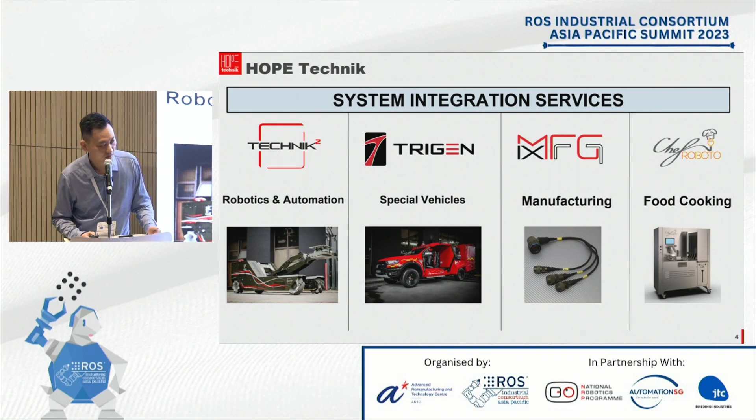For today's session, I'll focus a bit more on Technik Square, the special projects department that does a lot of crazy projects throughout the years. As you can see, in one shot, there are different solutions for different industries from a different TRL level, from low TRL to high TRL level.

Okay, but we don't go that low. We will start off at around 5 to 6, and then progress all the way to 9, which is a full-fledged product with all the ILS support as well.

So we are into farming, vertical robotics farming, and you can see tunnel inspection robots that run through 40 km of the underground tunnel that is manned by the SP group, as well as a firefighting robot that enables you to force multiply for Homeland Security, and developing projects like a mobile hospital delivery robot whereby we serve food

trays to the patients. That is a bit more experimental because when we serve things to patients, it's not like a cobot whereby the robot can actually touch softly onto the patients. This arm is not supposed to even touch the patient at all, because we are afraid that patients will actually sue you if you touch them even a bit. So it's a different kind of safety mechanism.

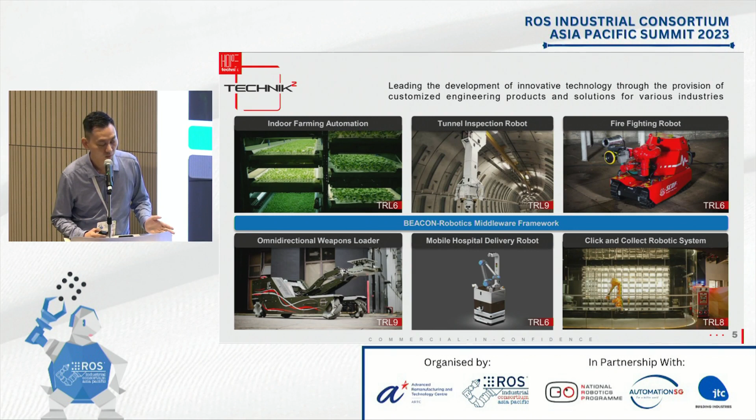And even in public spaces like click and collect robotic systems that we implement for the Funan Lifestyle Mall, I think that is very refreshing because in public spaces we have our own set of challenges. So we did things from indoors to outdoors, to ruggedized, to defense domain. We are a team of around 90 to 100 engineers in Technik. That's our strength. Okay, let's start off our journey.

We mainly classify our robotics into 4 areas, the 4 A's as we call it. It comes from assistive, whereby semi-automated robots help and enable a person to do more, followed by automation, which everybody knows, then the autonomous part. After that, when we gather enough data, we use analytics, the smartness of it, to make sense of the data, which we are actually doing right now.

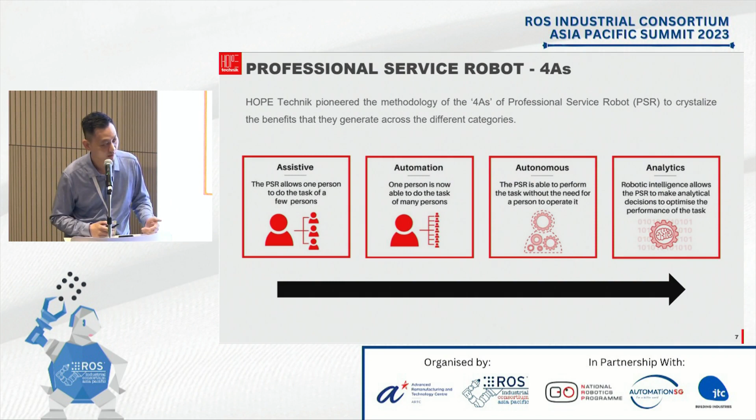The first 5 years is interesting. Remember we talked about selling car parts and it didn't work out, so we were forced to go into robotics. Way back then, we were into flying robots, what we call drones, whether landing on the ground or on the sea. Anything that flies back then was a big thing, so we were absolutely crazy about that. We were also into small platforms, wheel platforms, track platforms, putting simple payloads on them to enable simple tasks. That was way back then - Arduino, autopilot, all interesting stuff - but we moved on from there.

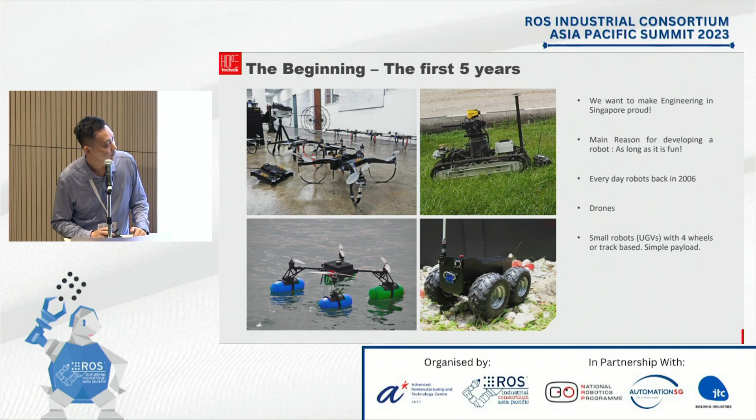What happens after the first 5 years? In the very first 5 years, it was all about the fun factor - anything that's fun, we were crazy about it, we were a small group and wanted to do that. Then as we progressed, we found that we needed to earn some money.

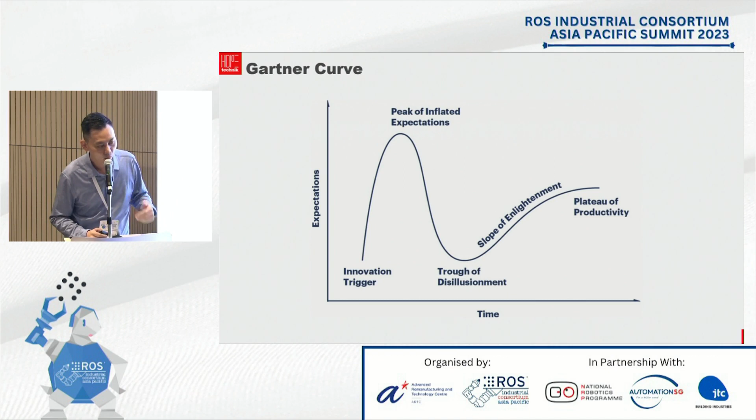So we got to know the Gartner curve. Not too sure if anybody knows that, but a new hype usually starts from the left-hand side, and everybody goes wow. Then through technology, experimentation and actual use, people find that it falls short of expectations, and they start to lose confidence. Then it cools off for a while. Engineers begin to wake up and do a bit more, and then it moves to the right of the curve and becomes ready for the industry. But we actually have products along the entire curve, which we'll explain later.

So we began to focus a bit more on the social and the P&L portion - P&L to survive, definitely, and also a social part. We want to do something that means a lot to the customer, to actually help Singapore as well, because we take pride in our engineering. We want to make engineering great in Singapore. That's actually the key mission for Hope Technik.

On the left-hand side you can see AMRs. These are early days - anything that moves from point A to point B is actually great, delivering stuff in semiconductor industries. Also semi-assistive robots, for example the bed mover, where we plug something into the manual bed and are able to power-assist it, so fewer people are needed to navigate and push the bed. Things like that. We also thought about a firefighting robot, and for Airbus we did something like an aircraft that is able to launch mid-air to test out their flights.

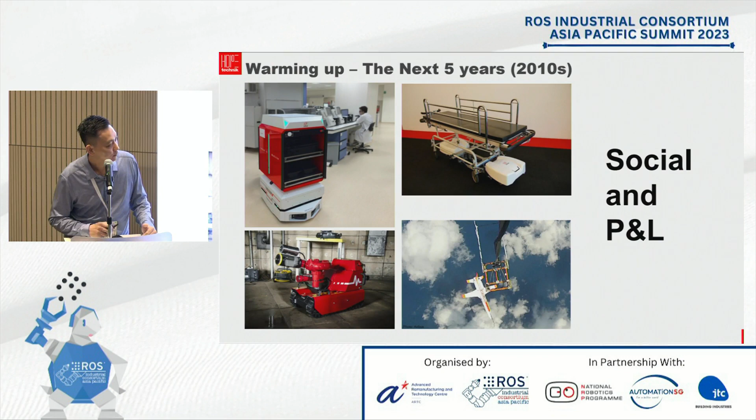This is a big picture on drones, tethered drones, and also UGVs that we demonstrated at one of our National Day events at the National Stadium. That's kind of a big thing to us, because unlike regular projects, National Day doesn't move - no matter what, we need to get it to work. The communication frequencies were very challenging as well, since everybody is using some sort of frequency, and we were down to very challenging, narrow bandwidth, so we had to make do with that. We had to get creative and use our fundamental engineering to do that.

But that's not the point. The point here is, if you look at the extreme right-hand side, you can see a drone, the DJI drone - how cheap is that? So it mainly points to a sunset industry for drones for us. We are very sad to embrace that, but that's the sad truth. We have to scale down our drone activities because things are getting cheaper and cheaper, which is a good thing for technology, but for us we have to pivot, because we can't be building custom drone platforms better than DJI unless they're very, very big drones. So we decided to move on.

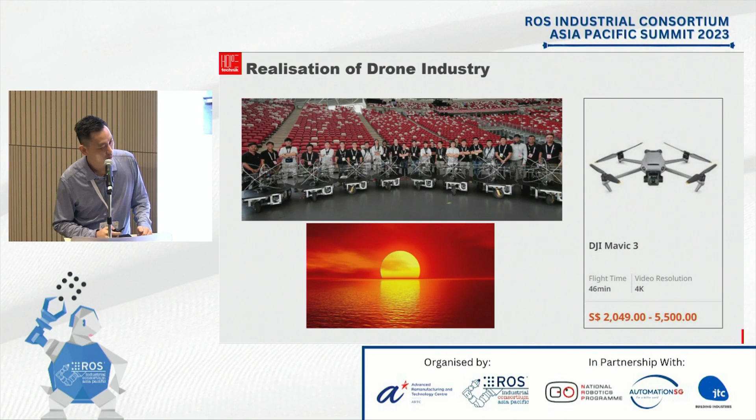And also things like the casualty relay robot used in homeland security, following the line-following technique instead of autonomous. Of course, as we move along, it gets more and more autonomous, but back then it was actually a line-following robot. It has its merits, because in the red zone, we're able to lay the lines very quickly with our human perception, avoid obstacles, and then this structure just moves along. It does have its own merits, because if it were autonomous, if something comes up, it will just hang somewhere, right? But for this, it's a bit more stable.

So we have to make sure that we have the right technology for the right applications. Even if the technology is moving as fast as it can right now, is the industry ready? We have to pause and think. Are they willing to even spend that kind of money for that purpose? What problems does it solve? That's very important, so there's actually two fronts. I would say the industry is one or two notches back.

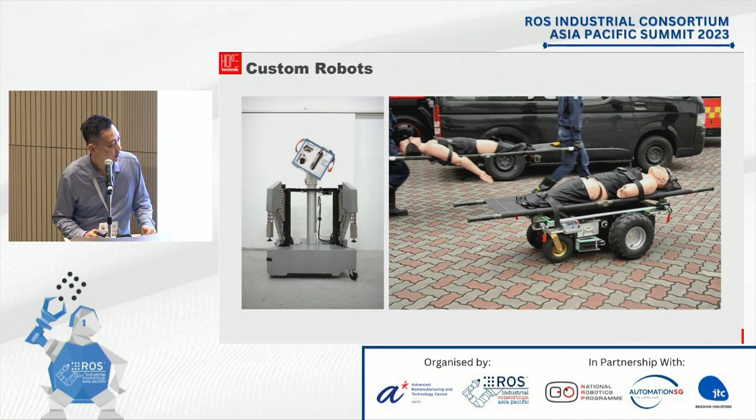And we also do exoskeletons, very interesting stuff, passive or even active. We have explored electronic, hydraulic, and pneumatic versions of it. We find that pneumatic versions actually work better, at least for the firefighters. This is one of our staff who came a long way, and he's kind of the father of exoskeletons in our team. Together with a small team, we are able to churn out exoskeletons.

This is very experimental, I would say, because back then Marvel and Iron Man were the key thing, right? So everybody that wears metal feels invincible. But when the engineers actually wear it, they find that there's actually more things to work on. So it's still very experimental. I believe one day we'll be able to be powered by these suits, giving us more dexterity and also power to perform our tasks. But right now, I would say it's very conservative. That's why you don't really see many effective powered exoskeletons around the world.

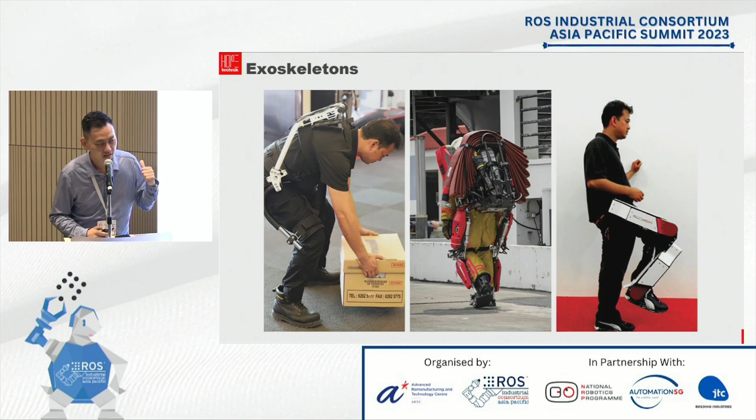But how many years has it been for this kind of robotics?

AMRs need to evolve as well, but evolve in a way that they get smarter, and when they see obstacles, they're not just able to stop, but able to avoid them using visual and other sensors. We spun off a separate company called Sesto Robotics in 2018 so that it could focus on the product and the platform. You can see on the right-hand side it actually has a removable payload layer, because initially we were integrating everything by itself, so our thought process, everything was not really modular. As we go on, we want to scale a bit more, that's why we adopt modular solutions. Having a removable payload is very important for us, as it gives better ROI to the customers.

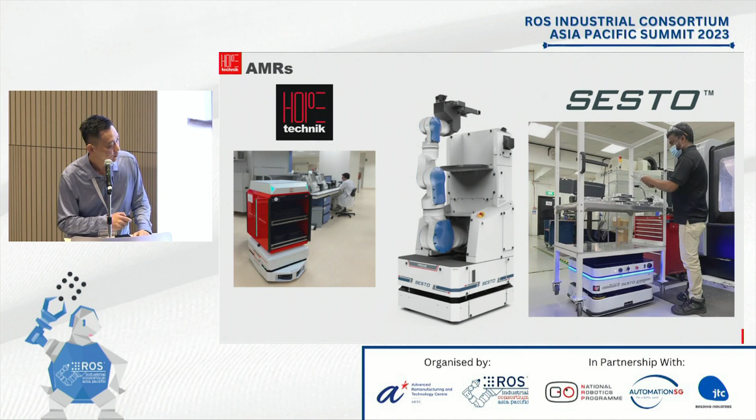Okay, so back to the tunnel inspection robot. We make use of certain technologies that are somewhere in the middle of the Gartner curve - not to the extreme right, but not too far to the left either. Because back then we found that if we get too conservative, it doesn't really serve the purpose of a tunnel inspection robot, so we have to do something there. But you know there's an 80-20 rule, so the 20% that is lacking in features, we have to make do and work out with the customer so that we can walk the journey together. If not, we will forever be unable to embrace certain technologies.

That's very important. I will split the customers into two parts. One part of the customers will be very profit and cost conscious - what can you save them? You can have the sexiest technology, but if it's not going to save them money or solve their problem, they won't invest.

They would like to see other people adopting it, but it doesn't always work out for the business. After we tell them the cost, they'll start asking for a more cost-affordable solution, and that's where the technology actually scales down. The other type of customer is more tech-focused, more for show rather than solving real world problems. We have both kinds of customers, so there are two categories.

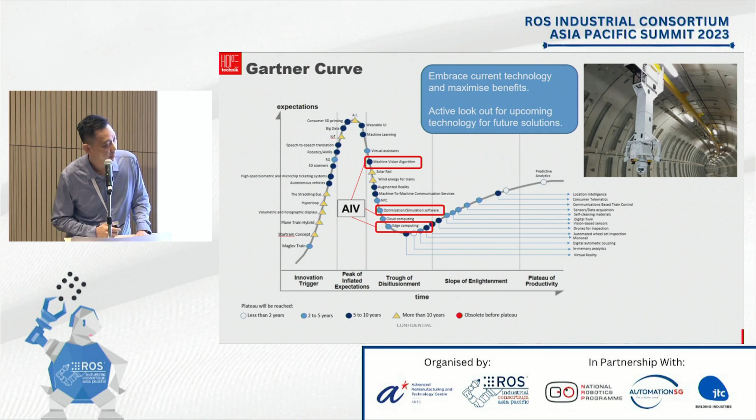As we move along, we need to talk about scalability, because just making platforms and solutions across many industries doesn't really work out like that. We need to see how we can push the boundaries in terms of tech, and also solve real world problems.

For example, on the extreme right hand side, you can see this autonomous outdoor forklift that was done a few years ago to test whether it makes sense and what boundary conditions we'd have when deploying autonomous forklifts outdoors. The pallet has payloads that are double layer and very flimsy. These are real problems - not just detecting the pallet and picking things up, but what if the thing is flimsy? What kind of mechanism should you have to balance it, and how can you structure the whole environment so it can better be used in the real world?

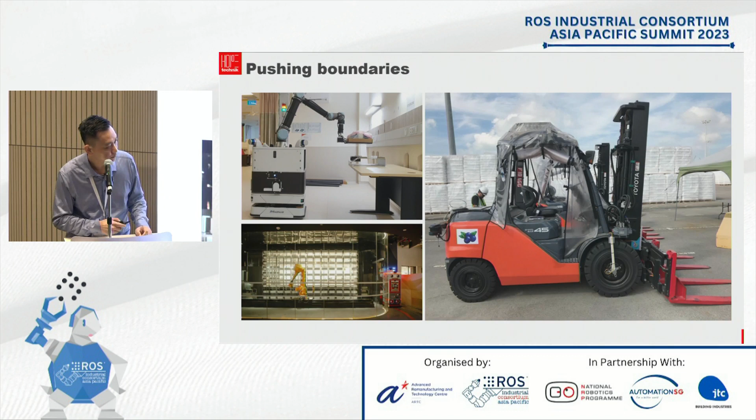As we move along, we have a partnership with SIAEC. We did engine inspection robots and also seat track inspection robots to check the conditions of the seat track, so that inspectors can pick this up more effectively, leading to manpower savings.

If you take a look at this, the technology we use is not the latest and greatest - it's not the AI version, it's like one step back, because it just works for them and there's no reason to spend additional money. Of course, as the AI gets better, we will be a fast follower and adopter of it too, so we can put a bit of smartness inside and make things work better.

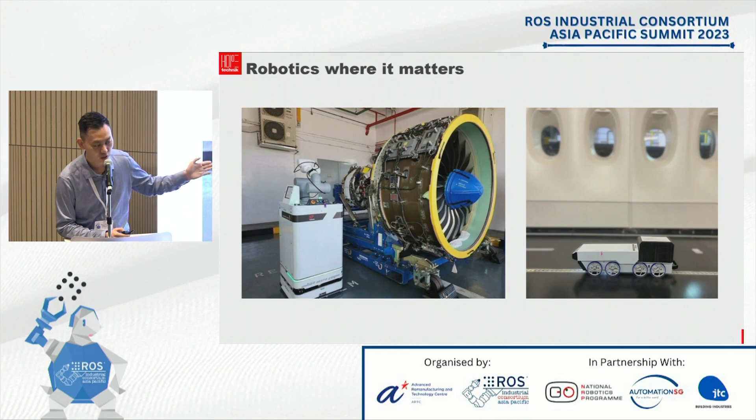But that doesn't mean they're willing to pay for that right now, because to use AI and such, the company - at least for SME - needs enough talent to actually do this, and how many months do we have before we can have that capability and implement it in the short duration of time that they want? These are things we also consider.

Vertical farming as well - we are talking about robotics vertical farming. Vertical farming is pretty common, but robotics vertical farming is not that common. That's why we started to sensorize a lot of things, doing a lot of IoT and putting things in the cloud so we're able to manage this automation. A lot of PLC has been used as well. But for some projects like defense projects and other customers, we use a lot of on-prem stuff, so cloud access is not there. We have to select our technologies accordingly.

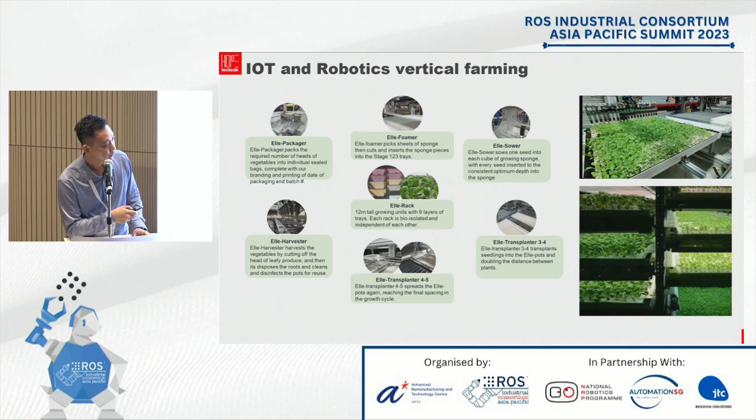Yes, I think many of you have seen this before - that's the robotics middleware framework, as taught by many people as well. We got into this a few years ago under a grant by MOH and also NRP. Very fortunate to have the grant, thanks to them. Working together with our partners, we came up with this middleware layer that was meant for healthcare, but we all know it's agnostic to industries.

That's why we use it in our projects as well - not necessarily as a product. Sometimes we use it as a product, sometimes we put it as a layer into our project so we can enjoy that kind of scalability and future-proofing. It allows different brands of robots and systems to gel together, and also the infrastructure to connect to this layer so we have better command and control, prioritization, and traffic control.

I think that's kind of the in thing right now, because a single solution doesn't come from a single brand of robots - it comes from different sectors, different suppliers, different brands of robot systems. So as system integrators, we need to have something that's able to bring everybody together.

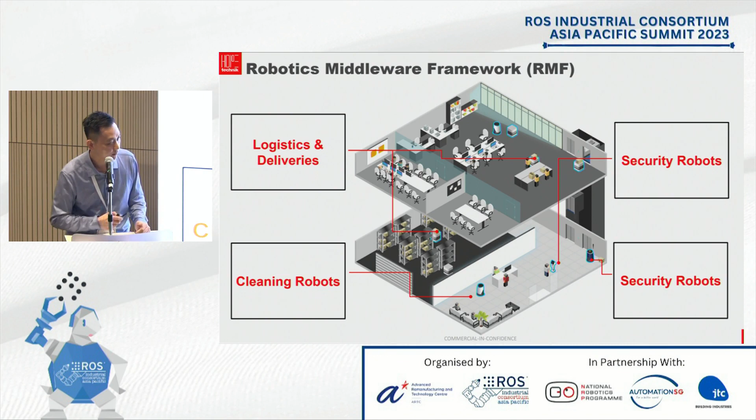So what is next for us? Right, so very recently, we have integrated more advanced payloads into different platforms.

And also, if we use platforms from all around the world, if we need secure communications, how are you going to do it? So we are also developing a certain secure comms kit that we can plug and play into different robots as we deem fit. So it all boils down to the application that is required, and then we develop a technology for it. And we don't reinvent the wheel - if there's something out there, we will definitely use it.

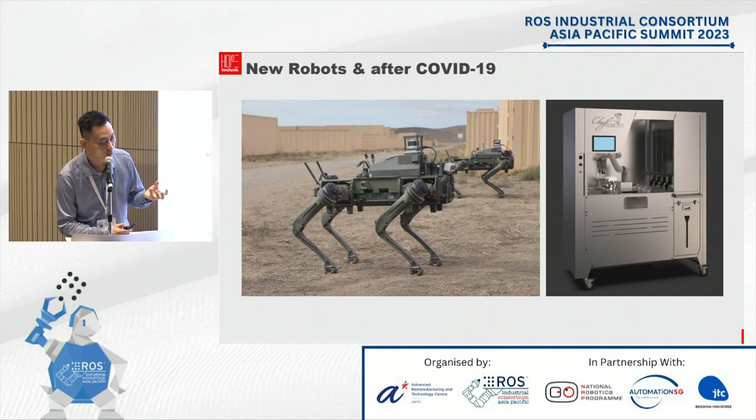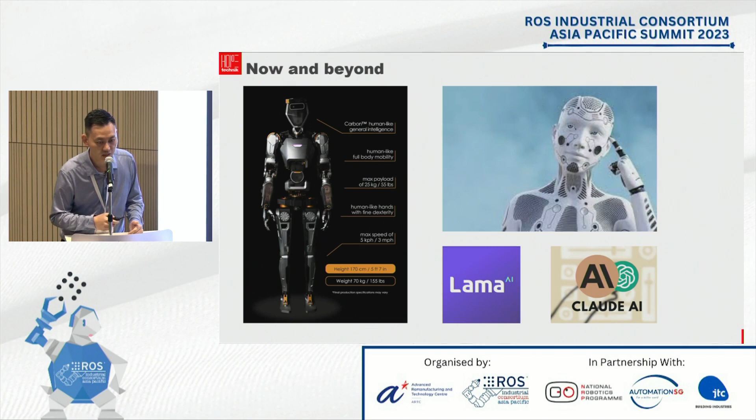So that is something that we need to be practical about. If they are not going to pay a lot, then how can we even squeeze in these kinds of technologies right now? So I would say that there's some lag there, and the expectation is if everybody is doing it, it should be cheap.

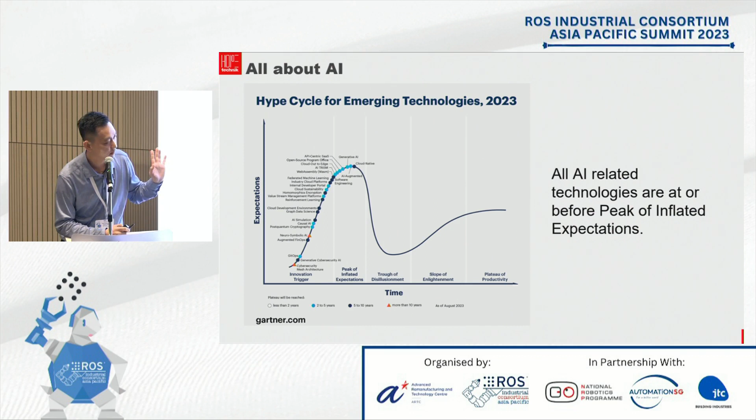So in a nutshell, how did we progress? We progressed from small and fun robots - things that fly in the air. And after that, we get a bit more practical because we need to survive, and they work on bigger platforms, but at that time, not really scalable.

And then after that, we moved on to products and systems that actually work and scale in terms of solutioning as well. And then after that, we began to use more cloud-based technologies, IoT, a lot of sensorizing so that we can gather a bit more data. So we use low-level AI because we roughly will know, since we are experienced in certain movements, parts, and the behavioral systems, and also in vehicles. So we are able to categorize certain parameters and use low-level AI to determine certain characteristics, and also, for example, in preventive maintenance.

Then there's an AI explosion lately, and it gets much smarter. So we see that robots will get even smarter, and hopefully the industry can actually catch up and pay good money so that all the different companies can adopt it and present to the entire world and use it better, I would say.

So that comes to the end of my speech. I would like to end off with something that I always talk about. We need to fall in love with the problem that the customer is facing, not really the technology. We need to find the right technology for our problem. That is really the common mistake that we also make. Some engineers will be very interested in certain technologies and will always find unique selling points to justify the use of their technology, but the numbers don't lie. When we do the numbers, it's not ready yet, so we have to discard it. That is sad to say, but it's still happening, and nevertheless, I think both fronts need to be pushed, technology and industry, so that we can have a balance there.